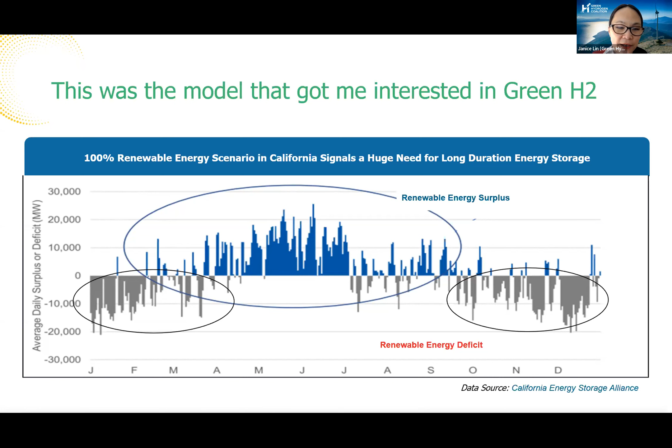Then in my research, I kind of followed in the footsteps of Dr. Starner and learned everything that he already knew way back in 2010: that hydrogen was a mature commodity, that the cost of producing green hydrogen would dramatically fall with scale, and that you could use green hydrogen to decarbonize just about every sector. Some years later, this was 2016, after learning all this, I decided that this really powerful, abundant molecule made from renewable sources was the key to a more sustainable future for our planet.

And I did what every inspired person does: I went out and started a new nonprofit called the Green Hydrogen Coalition. We formally launched the GHC in 2019 as a 501c3 educational nonprofit whose mission is to accelerate a green hydrogen economy. But we're doing it with a little twist, because as you know, there are many nonprofits focused on hydrogen.

One, we're solely focused on green hydrogen. Secondly, we have a thesis that the way to accelerate progress is to simultaneously scale both supply and demand.

Since 2010 till today, the urgency is upon us to go faster. We have to move faster to curb emissions and stop climate change. The rate of climate disaster happening around the world is only accelerating. And as noted by the Consul General, the imperative to have even more diverse sources of energy is upon us.

So the question is, how do we compress this timeline? All analysts agree that green hydrogen will be lowest cost in the future. Some say 2040, 2045, 2050. We need to accelerate that reality to something like 2030.

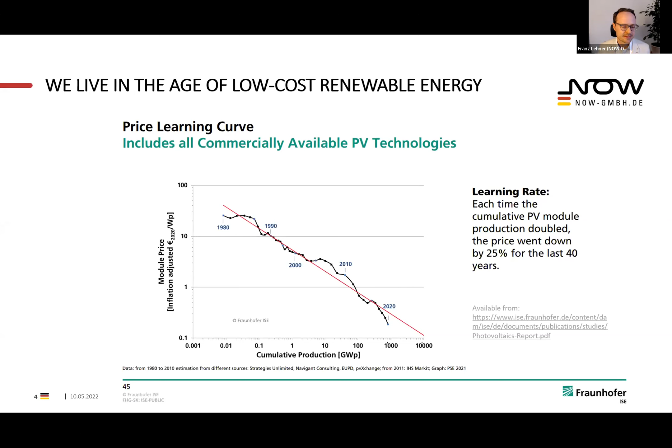So now we have low-cost energy available, but the problem is we have built our energy system on fossil fuels because they used to be cheaper. But for new projects, we can now use renewables as the cheapest solution, and that is exactly what Germany is planning. But also on a global scale, I think it can be said with full certainty that renewable energy is probably the best chance we have to still get to a 1.5-degree scenario by 2050.

Because we have seen in the last 20 years how quickly we can scale up solar and wind, and it's essential how we continue this growth to 2030. So we really need to further speed up and stay on this exponential growth trajectory, around 20% plus per year of solar and wind power generation combined. And that could put us on a track to reach the targets.

I'd like to reemphasize what Janice said: we have the technologies that can get us to low carbon energies, also with hydrogen. We just have to get started, as we did 20 years ago with solar and PV, to really ramp this up. We have to ramp up electrolysis and the production of green hydrogen to get the costs down. The technologies have been known and understood for a long time, but they have to be further optimized, and there's a lot of R&D potential there. But that should not stop us from acting now.

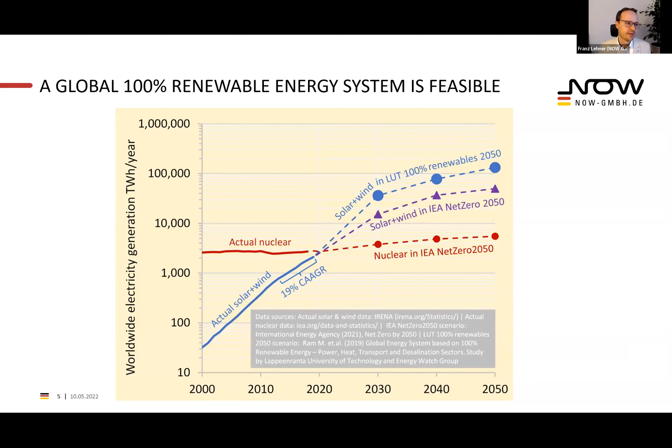We have built our energy system based on fossil fuels. Today, that's the same situation globally, roughly as it is in Germany. We use 80% fossil fuels in the form of molecules in our end users, and only 20% electrons. The academic solution would be to try to change the demand side to full electric use as much as possible, because on the supply side we increasingly get electrons from solar and wind.

But then the challenge in this transition is that we really have to focus on those options that are fast deployable. I think it's a legitimate question to prioritize those measures that are fast to deploy. Just think of how to transition the entire residential sector, building, heating, to heat pumps that can run on electricity, and then also the power grid that has to accommodate this winter load, for example in Germany - that's a process that will take time. We can't really expect that we'll have done this transition within a few decades. This is a lengthy process.

We've seen in the past that on the demand side, measures are slower to implement than on the supply side. So my argument would be to focus on solar and wind to really scale up the supply side, continue work on the demand side as well, but make sure we have enough clean energy available as quickly as possible. This then also requires huge amounts of storage, especially in our climate in Germany.

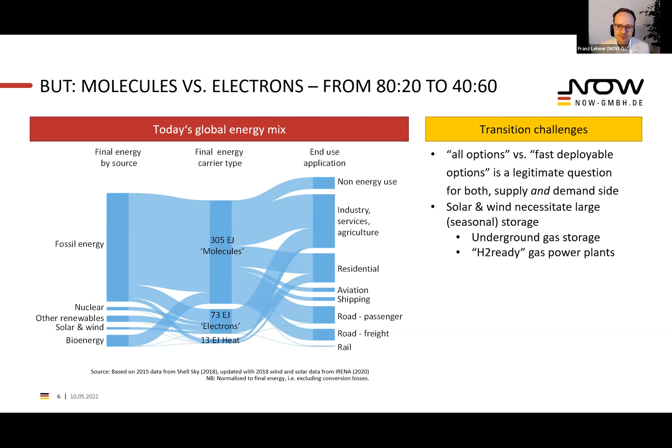We face the problem that batteries are not a solution for annual energy storage. You would essentially have one cycle, charge and discharge, because in a battery the storage capacity and the power density are coupled, whereas in hydrogen you can decouple that, especially with underground storage. That's a relatively low-cost way of storing huge amounts of energy. And then the generation and the use of hydrogen are separate from that storage capacity.

In Germany as well, we have to repurpose or refurbish our power generation capacity to allow for hydrogen use to fill the gaps between wind and solar generation.

Now with the war in Ukraine, we want to speed up the transition away from natural gas, which could also mean that for some more years than initially planned we would use more coal, but then instead of using natural gas as a bridging technology, we'd be able to directly switch to low carbon renewable solutions, and thereby in the long run have the same or even lower emissions in balance.

What I'd like to emphasize is: if we acknowledge that the challenge is to replace fossil fuels in all those large use sectors, industrial uses, we anyway have to make sure green hydrogen becomes really low cost. To be a bit provocative, it has to get dirt cheap, as cheap as fossils are today essentially. Otherwise we can't run those industries in Germany - they won't be competitive. So if we think hydrogen will always be scarce and expensive, we're already saying we will fail this challenge, because we can't subsidize those industries forever.

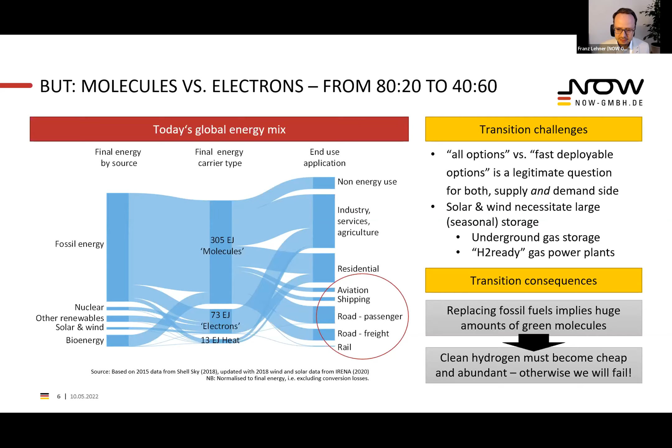As part of our international activities, we represent Germany in Mission Innovation's Clean Hydrogen Mission, where we work together with the United States on reaching the goal of 100 hydrogen valleys globally by 2030, as well as reducing the end-to-end costs dramatically, below $2 per kilogram. And you'll be aware of the Earthshot, where for generation costs the US is aiming at even $1 per kilogram by 2030.

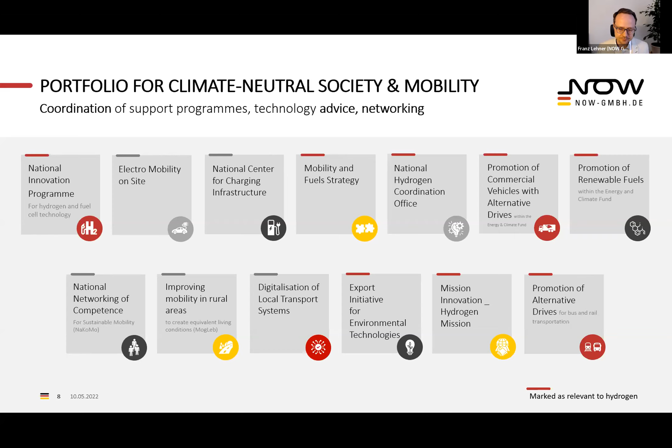Here's a snapshot of where we are currently in Germany. Roughly 100 refueling stations for hydrogen are deployed across the country. We have funding approved and in the pipeline for around 3,300 fuel cell vehicles. On the road today are about half of them, and the rest is in the pipeline to come.

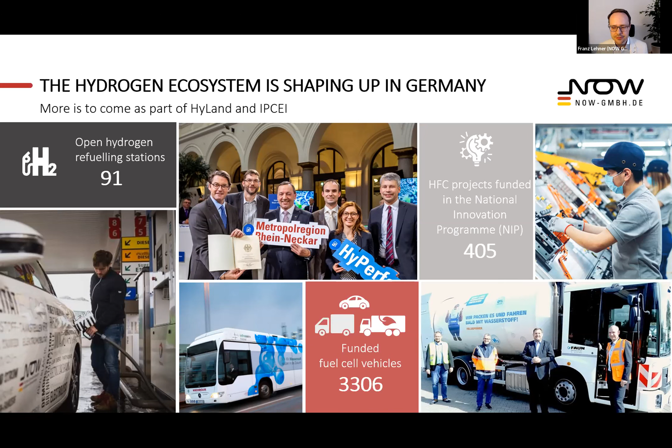We have supported with our National Innovation Program for Hydrogen Fuel Cell Technology more than 400 research, development, and demonstration projects. The refueling infrastructure in Germany follows the approach that we want to solve the hen-egg problem by firstly rolling out the 700-bar refueling infrastructure for passenger cars and counting on the OEMs to then deliver those cars.

That hasn't happened as far as the German OEMs are concerned, so we are now dependent on Toyota and Hyundai to deliver their cars to Germany. And going forward, we will focus our support on heavy-duty applications and adapt existing stations and build new stations for 350 bars to supply heavy-duty vehicles.

I know that California has used a similar approach, but there the OEMs have given the numbers of how many cars they're planning to introduce, and then accordingly the infrastructure has been rolled out.

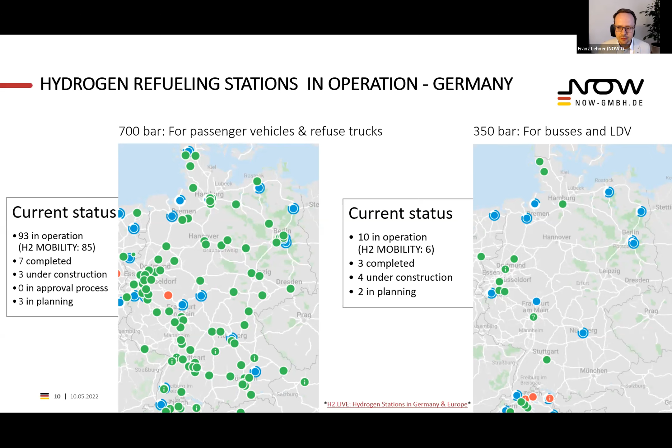At NOW, we support projects along the value chain in hydrogen, from generation of fuels, but then focusing on the demand side with different vehicle type classes and support programs for R&D in various fields. We also work on standards development and agreeing regulatory frameworks with other countries and as part of the European Union.

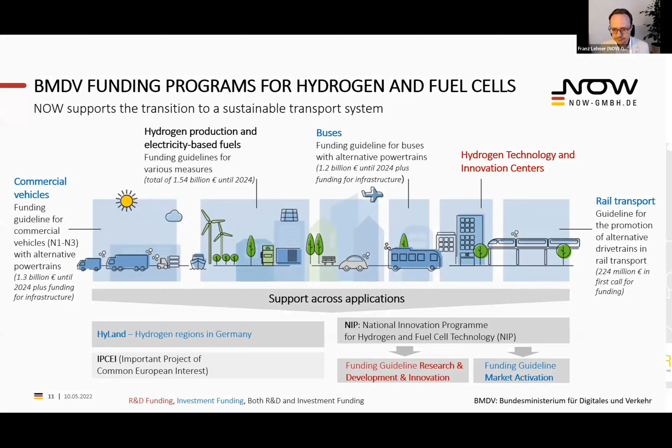One thing that stands out is our regional approach. In Germany, we have the HyLand program, and the HyPerformer regions are something that we would call on the international level a hydrogen valley, an integrated ecosystem from generation, transport, and use of hydrogen.

This is also something we work on at an international level together, for example, with the US as part of the Clean Hydrogen Mission. Why is this important to work with these regional concepts and establish hydrogen hubs? I think it's because we can't just use a top-down approach where through a regulatory framework we incentivize the use of hydrogen. We also need to give the regions, the municipalities, the transport system operators on the ground, what they need to get started with these new technologies.

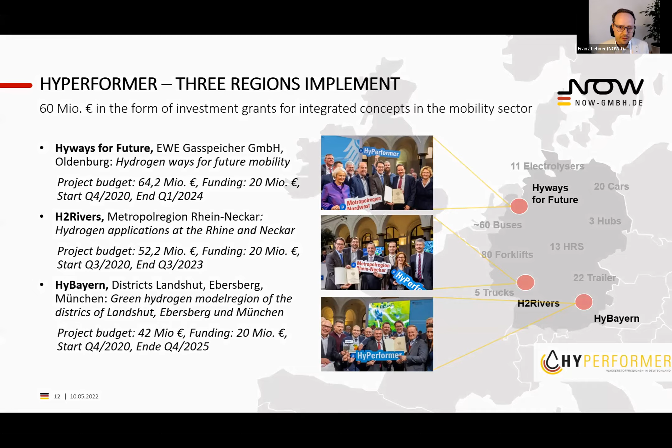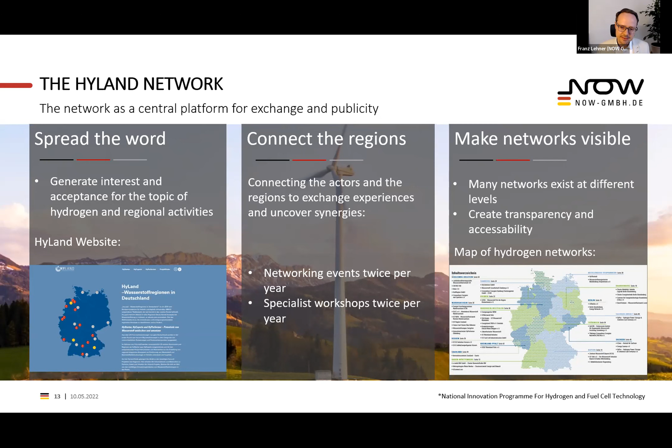So the HyLand program is meant to spread the word, to connect the regions, and to give them the tools they need to develop and also get this across in the international scene.

And then bilateral exchanges that we have and are planning to increase with other nations on the topics of industrial development in the area of fuels and hydrogen technologies, and also helping technology developments on both sides.

And in global affairs, we represent Germany in various initiatives. I mentioned the Clean Hydrogen Mission, but also the IPHE, the IEA Hydrogen Technology Collaboration Program, and we are also involved in H2 Global through the Ministry of Transport, which I will show in a bit.

So, recent policy developments in Germany: Oliver Schramm already mentioned the hydrogen strategy from 2020, which was the first consolidated, all-encompassing document across the different branches of government, where measures relating to the entire value chain have been agreed, along with quite significant funding, 2 billion euros for international activities. A big part of that goes to the H2 Global concept, which I'll mention in the next slide.

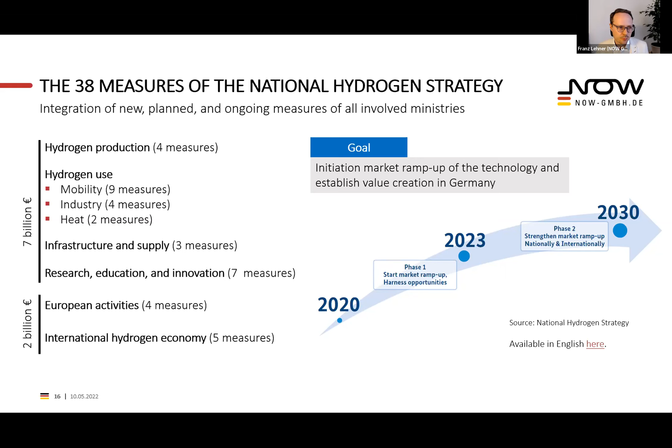So H2 Global is one specific concept and tool that other countries are also looking at, or even joining us in. It's a double auction system where the German government will cover the difference between the lowest production cost on the supply side and the highest bidding price on the demand side, essentially using this as a way of bridging the gap to economic viability.

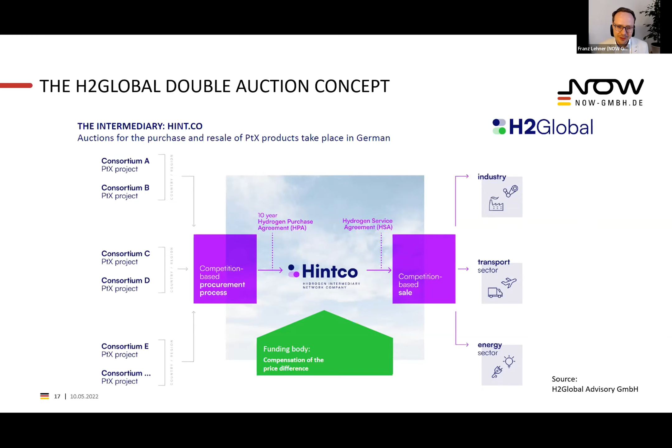That is the problem for many investment decisions right now. We will hopefully see the first round of auctions this year, and then we finally won't have only some studies that calculate the price of green hydrogen, but also a real market signal with a price, what it costs. I mentioned the new government that came into office, and I'd like to conclude with a statement by our Chancellor Olaf Scholz, given while he was visiting the United States in early February, just a few weeks before the invasion by Russia started.

He said, 'We will transform our economy, for the most part where gas is necessary, to a hydrogen-based one. And that will be a process which will happen much faster than some may think, but which will create a great future for all of us.' I underlined here the thing that it will happen much faster than some may think. We have to make it much faster than most people think, but I think there are also good chances, because we have the technology and the industry behind us, to make it really fast in this decade. Thank you very much, and looking forward to the panel discussion later.

Thank you, Franz, for sharing your great knowledge from the German perspective. I think it provides an interesting roadmap that California can look towards. It's now time to shift our attention towards our delegation participants. These experts of green hydrogen, power-to-X technologies and use cases demonstrate the future of our renewable industry, highlighting technologies and methods ready for immediate implementation.

Our first presentation will be by Michael Detering of Detering & Partner. Detering & Partner combines sustainable management and detail-oriented competence towards the entrepreneurial success of their clients. The company's focus is on techno-economical support, especially in the environmental and process engineering, infrastructure, and technical development area. Michael, the time is now yours.

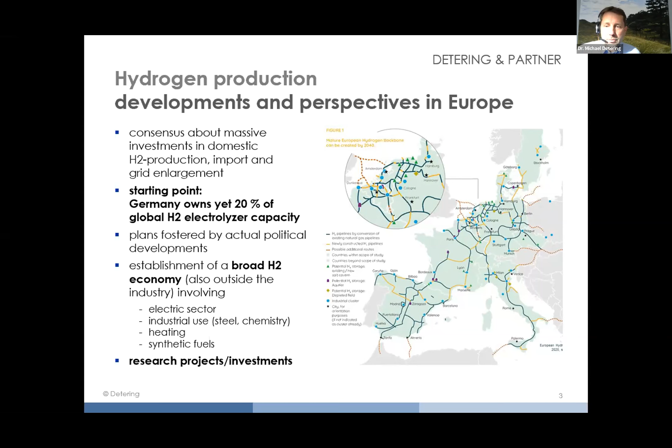Some quick notes about the situation in Germany: we have had hydrogen pipelines for more than 100 years now, and actually the pipeline system is being converted from natural gas towards hydrogen too. So there is some experience, and what you see here is that around 20% of the global electrolyzer capacity is concentrated in the small country of Germany. We already have a broad hydrogen economy, more or less in the chemical industry, and therefore some research is underway. California is on a similar way to do so. We heard about this already, so I'm going to skip the details here.

When we have a closer look at hydrogen, renewable production at the base, which is electricity, is a must for a renewable economy. The problem here, as I know from my past experience heading a large renewable fleet of hydropower stations, wind and solar combined, is that if you sell energy to the public, it's fine, but we need to relate electricity production to the external market and also to the hydrogen sector, and use cost-effective surplus energy. This means ramping up and down the operation of our electrolyzers, which is a big problem, because what an electrolyzer does not want is high volatility in its operation, because this leads to early aging of the components.

The actual electrolyzer technologies still bear massive disadvantages in cost, efficiency, and flexibility, because what an electrolyzer does not want is being operated on varying load. What some developers do is combine it with an additional battery, where energy is stored and then led to the electrolyzer to avoid too flexible operation. But this also costs energy, because the efficiency of good batteries is around 60 to 70%. So this also means a spill of valuable renewable energy.

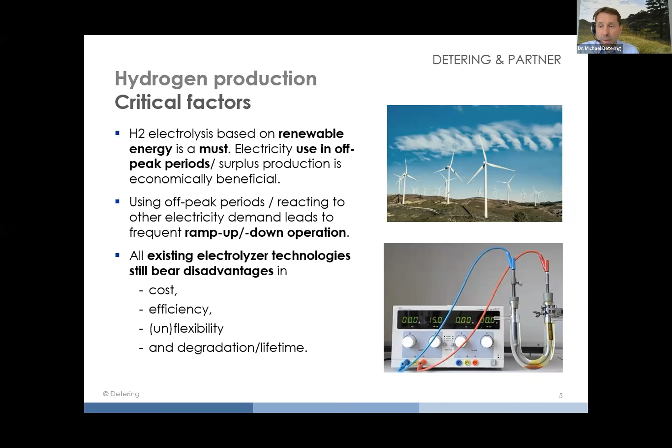And we have the issue of degradation of electrolyzers over time, depending on the technology. What we also see is that with very good materials, the more active an electrolyzer material is, the sooner it ages. The most effective materials have a lifetime of only some minutes, which is not suitable for industrial use, and therefore there is still room to grow. The main three technologies all bear advantages but also disadvantages.

Alkali electrolyzers are robust but not the most effective. PEM, which is a membrane technology, is a bit better in efficiency, but it does not like flexible operation.

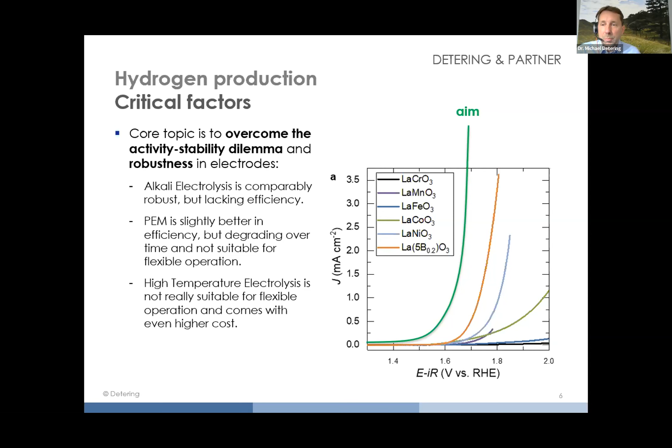High temperature electrolyzers are similar because you need to heat up the electrodes. The thing is how to optimize this. And here comes what we are actually working on with a consortium of several universities.

Our part in this is to bring it to market and look for ramping up and customizing the technology. What we actually have are new materials, high entropy materials, and we see the chance to overcome this because we have very promising lab results, which means the electrodes have the potential of a 5% higher efficiency.

Here we come to physical barriers, so we do not see an even larger increase due to physical limits. The other thing is that we have a significantly higher output. The current we can place on the electrodes is almost 3 times as high, and this means a 3 times higher output per unit.

Of course, we can triple the units, but this wouldn't make so much sense when we would like to increase commercial efficiency. This means a significantly higher output, also significantly longer lifetime, and especially higher flexibility. This is what we need in the future. So this is the actual status we have.

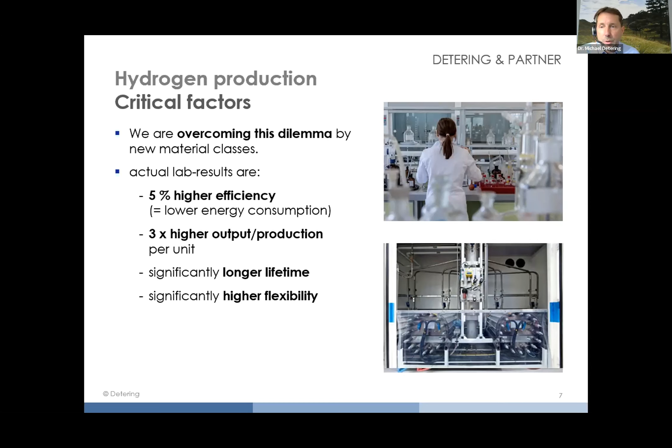The next steps are upscaling this technology to reach a higher technology readiness level, and prepare for future mass production. This means all scales, from industrial use to even home use for small electrolyzers, and having a business perspective on this. This is not limited to Germany or mid-Europe.

We are seeking business partners in the coming months to allow an efficient up-ramping of this technology. So we took the chance here, not having a ready product yet, but starting discussion on this, seeking business partners, taking the opportunity of this meeting and seeing what's going to come in the next months.

In case you have any questions, please ask them or use the chat section.

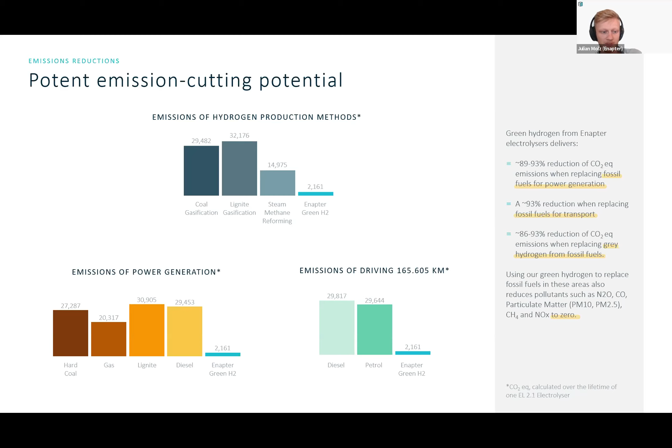What we see is that currently we are basically using oil and gas, mainly steam gas reforming, and to reduce this effectively and in very large amounts, hydrogen can be a big factor in achieving these goals. As Franz Lehner said as well, 80% of the energy currently used is in the form of molecules. So industries such as steel, cement, ceramic and so forth need a lot of energy, which is done with, or particularly done with, steam gas reforming.

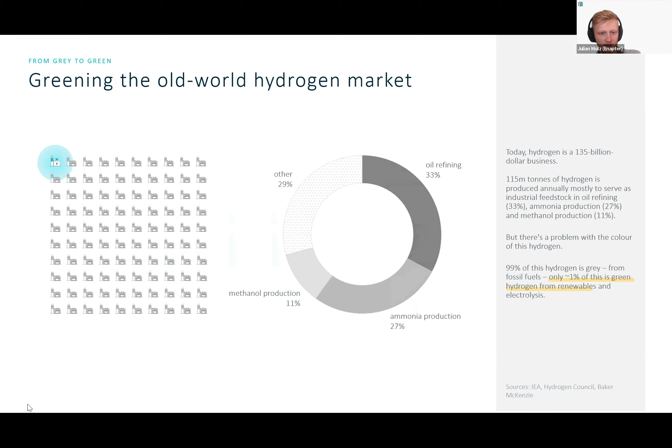But a lot of hydrogen is already in place for ammonia production, for oil refining, and for methanol production in particular. From our perspective, we need to greenify it. We need to reduce the CO2 emissions as far as possible, to move swiftly and to create a solution which is very viable. And of course, what is really crucial in doing this is bringing down the costs significantly for green hydrogen as well. This is one of the targets you will find with Enapter.

And then next to industrial needs requiring a lot of molecules, it could also be about industrial gases such as ammonia, methanol, and so forth, which are mainly produced with steam gas reforming at the moment. Due to rising gas prices, this will become even more viable, faster, with green hydrogen.

Enapter started itself in 2017. The technology we are working with is the AEM technology, which has been developed with a previous company called Acta Spa since 2004.

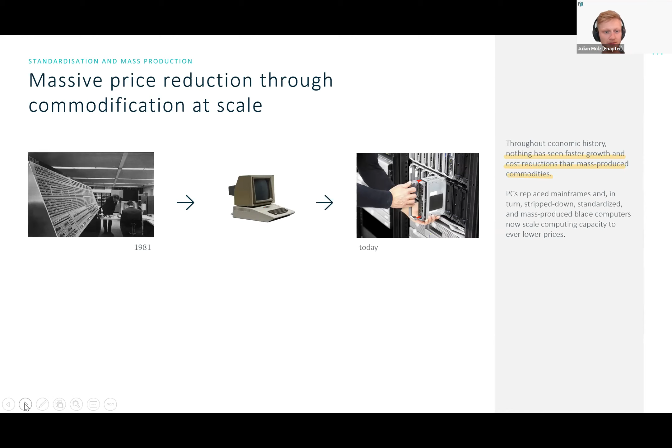And it's the same with the solar industry. In the past, we were mainly focused on utility scale applications, building very large energy plants. But particularly with solar modules, mainly 400 watts or even less, you're building up large capacities, a couple of megawatts and so forth, with very small modules. The same is the case here. Everything breaks down to standardization to bring down costs and provide a valuable product. Depending on the region, I think solar is now even the cheapest energy source you can find in the market.

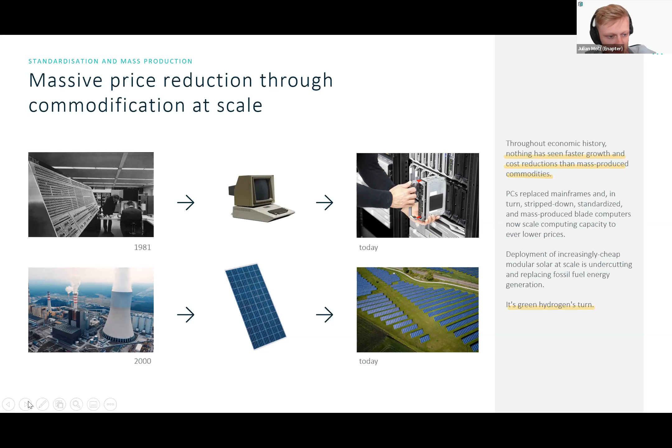My laptop is a bit slow today. I hope it's changing now.

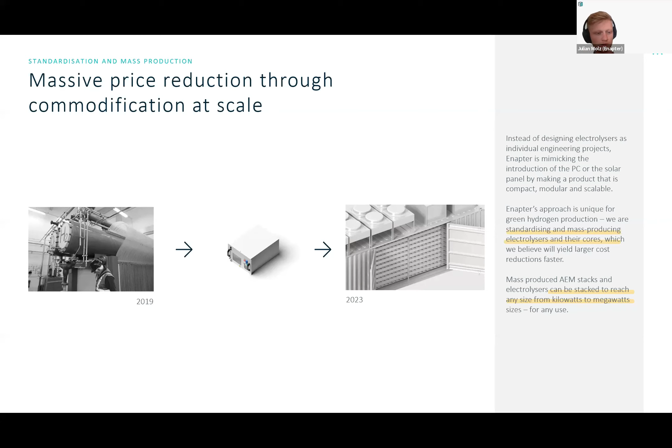What we are basically doing is packaging this differently. Instead of having a very large hydrogen production plant, we are putting it into a small module, as can be seen in the middle. But this can also be packaged in a megawatt container, just putting 420 of these 2.4 kilowatt electrolyzers into a 1 megawatt container, which offers a lot of flexibility, as units of 2.4 kilowatts will be connected to each other to produce at different rates at different times due to the load, due to, for instance, solar irradiance and so forth.

So what Enapter delivers is actually a technology in the middle ground. On one hand, we've already heard about the PEM system. I think the PEM system has the advantage of providing very pure hydrogen, mainly due to a membrane. Also in terms of efficiency and performance, it tends to perform better than an alkaline system. But the big bottleneck, and the lion's share of the cost, are the noble metals—using a lot of iridium, platinum, and so forth to build up that stack. This is an advantage of an alkaline system, providing a cheaper, more cost-effective solution, while using an electrolyte.

What you'll find on the anodic side is that we are using a 1% KOH solution. This way, we are mainly working with nickel and stainless steel to build up that stack itself, to provide strong performance and efficiency, as well as a technology which is as cheap as possible, to tackle as many projects as soon as possible.

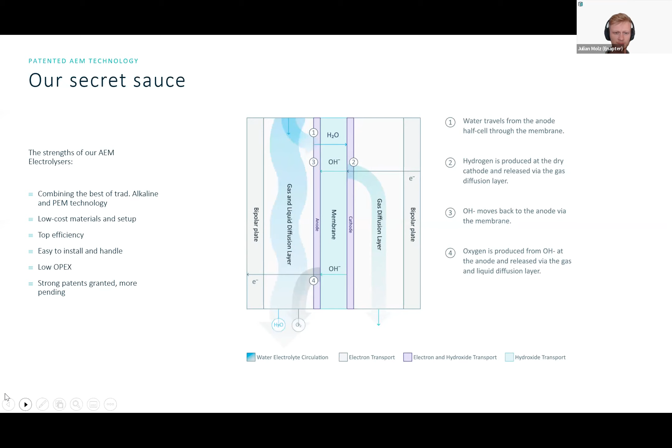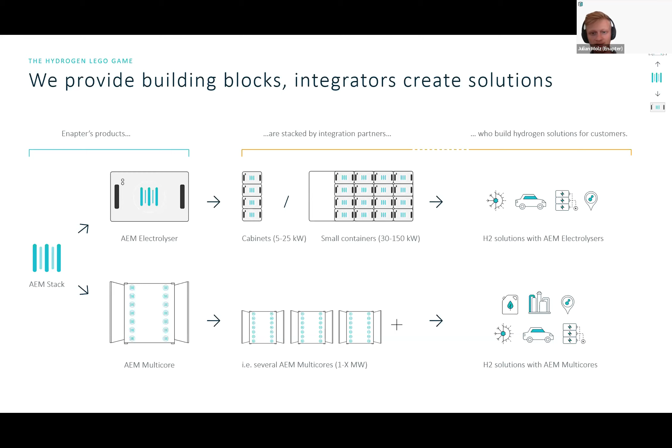As Enapter, since we are focusing on the manufacturing of these devices, we are mainly looking for integrators who can package it all together. In almost all cases, the end customer would also require a storage solution, maybe a fuel cell, maybe a compressor for that whole system. So we are very much on the lookout for integrators who can deliver a turnkey solution to the end client. I see Preston is already here.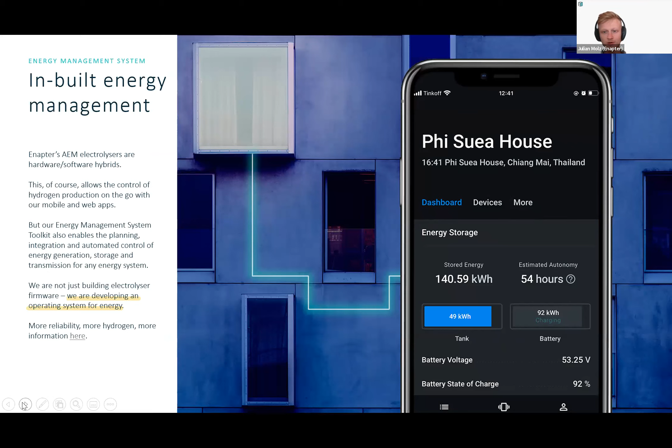I'll try to wrap it up quite quickly. Our system also comes with an energy management system, so you can integrate third-party devices to form a full system in which everything can be controlled.

As said in the beginning, we already have a lot of use cases in very different industries, and we would be very happy to add even more to this. I would end with this slide. During this week, we are very happy to have quite some meetings. Just reach out to either the organizers or to me directly, and we would be very happy to take it forward and meet you guys. Thanks for inviting us, and have a good day.

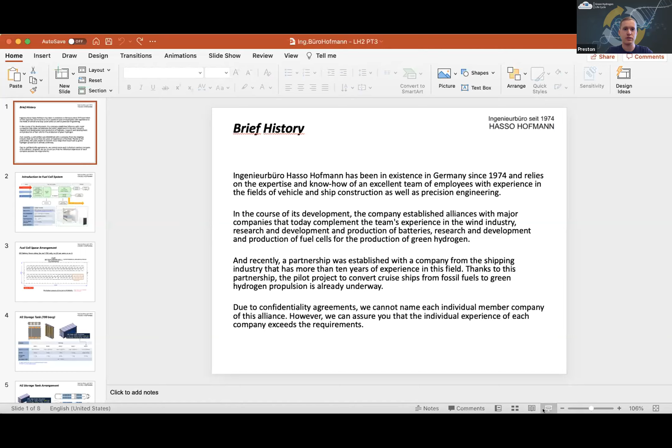We'll now move on to our third expert presentation from Hee-Jin Yoon Hoffman from the Engineering Office Hofmann. The Engineering Office Hofmann has been evaluating the furnishings and technical systems of various sectors. For example, one of their projects focuses on working with high-pressure hydrogen storage tanks, used in hydrogen-powered vehicles and constructed with lightweight carbon fiber winding for mobile use. Hee-Jin is joined by Peter Marcus from Nirvana Cruises, which develops and constructs innovative luxury small cruise ships. These two companies work together on maritime hydrogen activities. I now hand the time over to Peter Marcus.

Well, thank you, Preston. Good day to you all. As has been said, my name is Peter Marcus of Nirvana Cruises, and I have a very close cooperation with Mrs. Hee-Jin Yoon from Ingenieurbüro Hofmann, who has been in Germany since 1974, so she has a lot of experience and expertise in the field of renewable energies. It's a company with well-established employees with a lot of dedication and expertise in the wind industry. We have quite a few partners in the industries, in research and development, and in established projects in the hydrogen field. We cannot mention all of these, but one of them is quite a big multinational as well. So we have quite some serious partners in this business.

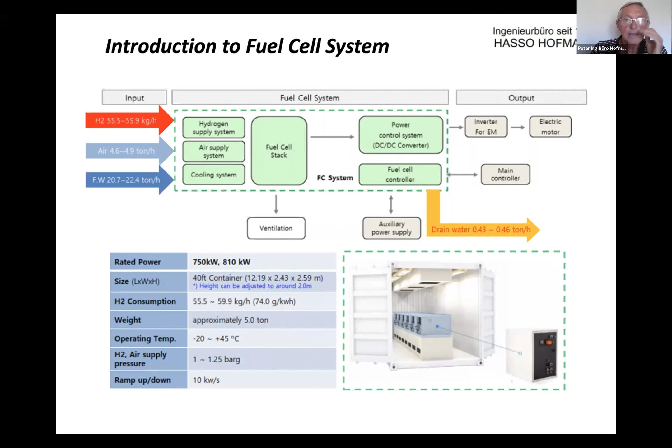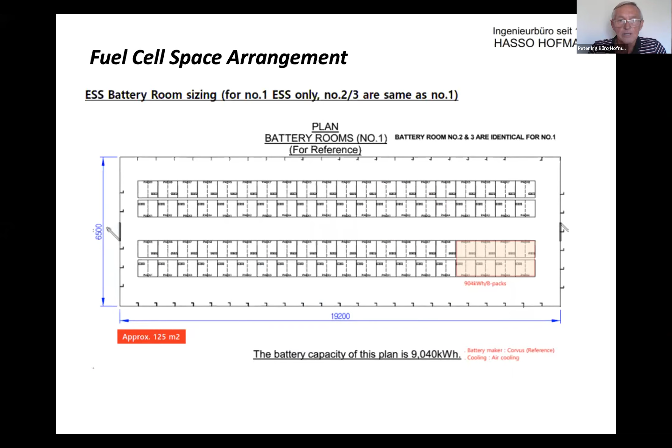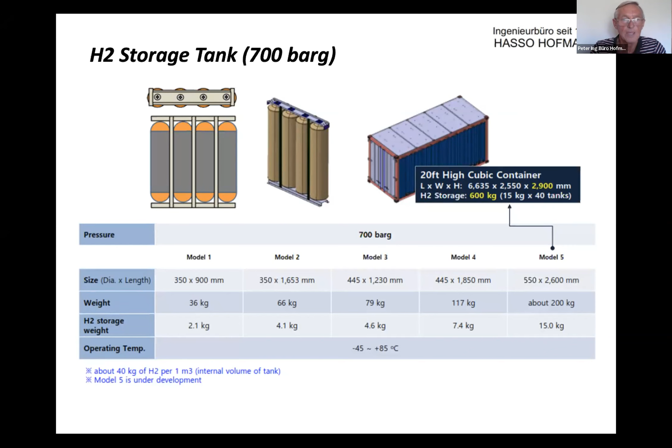The tanks can be placed in one big container, or in several containers, so the containers will be taken off the ship, four at a time, and exchanged with new ones. Thank you.

So the liquid hydrogen gives us a lot of advantages in using less space. And as you all probably appreciate, the space on the ships we need for passengers, which actually makes the money for our business. So we go with liquid hydrogen being our preferred option. Thank you.

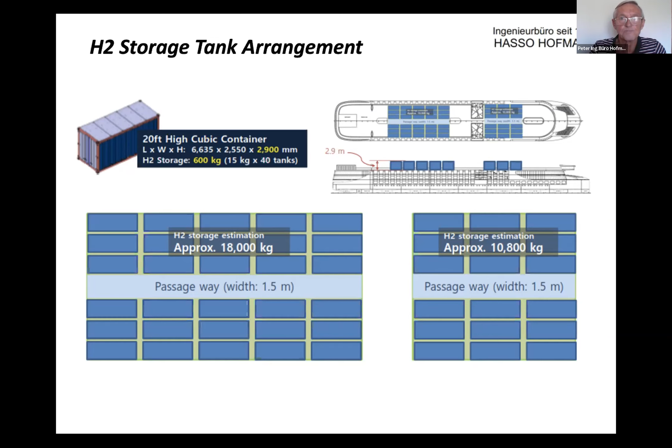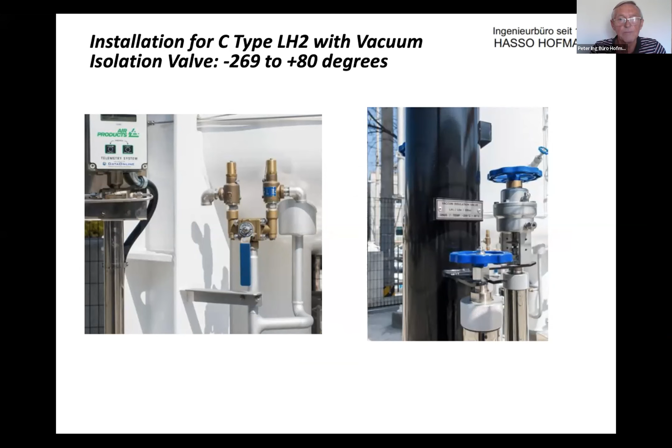Here's a more technical side on what type we use for the liquid hydrogen in the tanks and valves, which is not really my expertise, but questions may be asked later to my colleague Janice. Thank you.

Basically, here's the project as we would propose to any partner who would be interested in taking this on with Büro Hofmann. Of course, it can be done in a special purpose company, a joint venture, or any other form of business.

The way we do these things, we can take on everything, meaning we can design, develop, and construct any hydrogen plant, take care of the storage in gas or liquid form, and take care of transportation, whether on the road or on the water, either river or high seas. So we take care of the whole area of hydrogen, and we would like to invite any company in California interested in any joint venture or other form of cooperation with Büro Hofmann.

We would like to invite you, and we will get you a proposal on this project and see where we can bring it. Thank you very much.

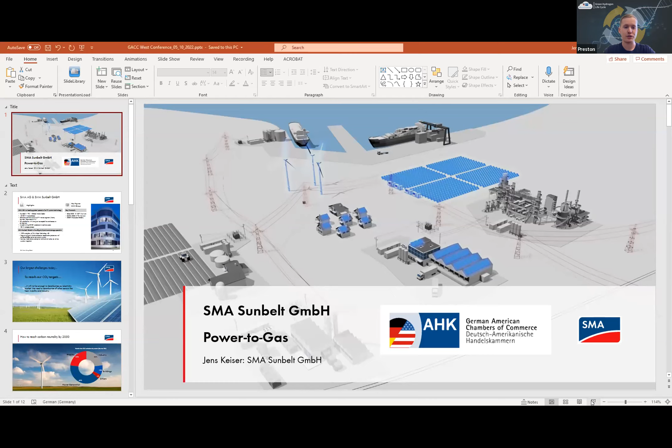Thank you very much, Preston, and thank you to the German-American Chamber of Commerce for putting on such a great event. It's a very timely event. My name is Jens Keiser.

I'm representing SMA Sunbelt GmbH, and we fairly recently went into the power-to-gas market, and today I'm going to tell you a little bit about how we fit into the hydrogen value chain. It's a fairly complex value chain, and we cover a small part of it.

So just a few words about our organizational setup. SMA is really known from the PV inverter space. We have the big mothership, SMA AG, which has a 40-year history with a global footprint covering all market segments of the PV market, from the home market to the business segment and large-scale utility projects.

We have done that on a global scale. I am part of SMA Sunbelt GmbH, which is a 100% subsidiary of SMA AG, and we are considered the speedboat of the mothership. We look into new market segments, less standardized products and projects, for example off-grid solutions, island electrification, and now more recently the power-to-gas market, which is basically the topic of SMA Sunbelt GmbH. We are located in Kassel, Germany, in the same buildings as SMA AG.

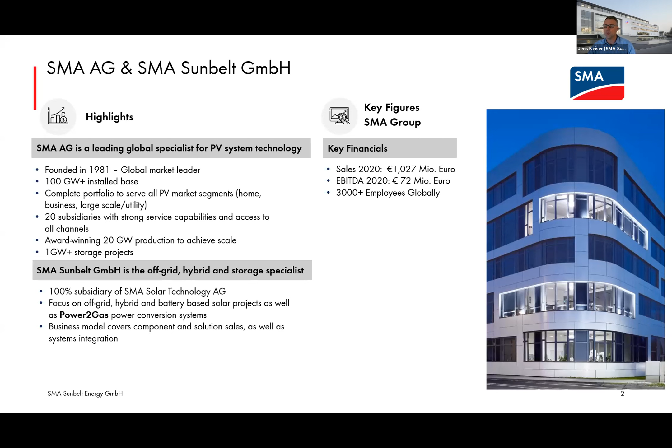The SMA group in general is a fairly mature organization. We have roughly €1 billion in revenue, EBITDA positive, and globally we have around just over 3,000 employees. So just a few general remarks.

At SMA, we always say our most important customer is the future, and we heard it from previous speakers already. The future is at the moment in trouble. We need to achieve our CO2 targets, and it's really not enough to just decarbonize the electricity sector. We really need to decarbonize all other sectors like heat, mobility, and industry. And that's why we believe green hydrogen will play a very critical role going forward to help decarbonize the planet.

Here are some numbers from the International Energy Agency. As you can see, the power generation sector is only 40% of CO2 emissions, and then mobility and industry represent 46% of global CO2 emissions, especially the industrial sector, as we already heard.

Market segments like cement, steel production, and refineries are already using gray hydrogen today. That all needs to be decarbonized. Heavy transportation, container shipping, aviation, long-haul trucking, rail - all of those need to be decarbonized as well, and you can't just electrify all those things. Building heat is another sector where we really need to go into, where green hydrogen will play an enormous role for achieving the climate goals.

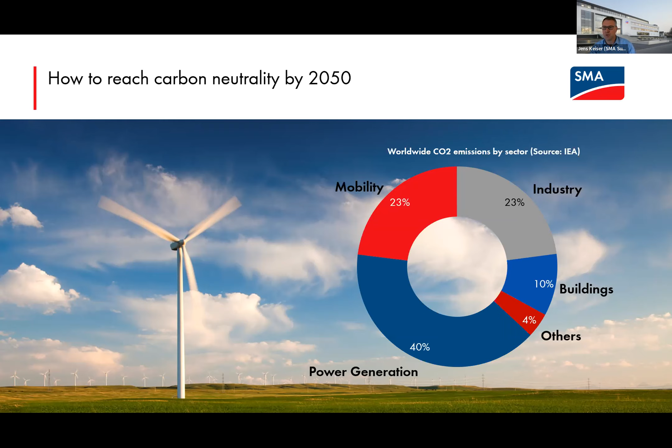So why hydrogen? We love hydrogen because it's super versatile. It has so many different roles. If I had to describe hydrogen with one word, I would say it's flexible. It can be a feedstock for different industrial processes. You can produce it locally. It's non-toxic and very versatile.

Or you can even transform it. If you have a biogenic CO2 source, you can convert it further to renewable CH4 and then inject it into the gas grid. So that's in itself an energy storage strategy - basically the existing gas grid is just a giant battery, and it's super abundant on the planet. So hydrogen has a lot of great qualities, and that's why we like to focus on the green hydrogen market as well.

If you talk about the green hydrogen market, we obviously have to talk about the electrolyzer market, which then plays into what we are doing. The electrolyzer market will explode over the next 10 years. We have some numbers here from IHS - there are different market studies out there, but generally speaking, we believe the global hydrogen electrolyzer market will be north of 150 gigawatts installed base by 2030.

We're happy to see that in 2020 the USA developed a national hydrogen roadmap, and in 2021 the Department of Energy started the Hydrogen Shot Initiative to get to $1 per kilogram in the next decade for clean hydrogen. I think that includes different pathways - they're looking at green and maybe also blue hydrogen. But it's good to see that the policy support is now coming in.

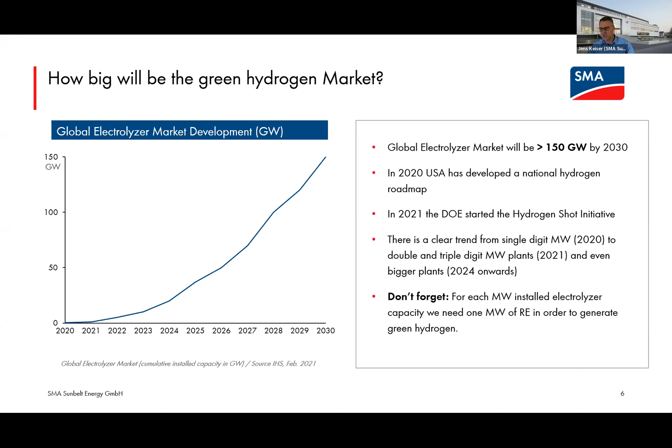What we are seeing on our side - we started getting into the power-to-gas market at the end of 2018 with a few folks, and now we're ramping up the team. Our initial projects were more in the single-digit megawatt space, and we fairly quickly moved into the double-digit megawatt space and are entering triple-digit projects already. It's really moving quickly, that market, which is great to see. And don't forget, for every megawatt of installed electrolyzer capacity, you need 1 megawatt of renewable energy to produce green hydrogen. So the momentum is great.

The market is coming, and this tells a little bit more about how - let me just start the pointer - so how we really fit into the hydrogen value chain.

So we are coming from the PV inverter space, doing the DC to AC conversion to connect to the grid, and that's where we really developed our core competency. We are all about power conversion. We know the global grid codes - we can do this in Australia, we can do this in India, we can do it in the US. We are present in 20 countries.

So we have a lot of knowledge about power conversion. And now we are taking our core competency, doing some adaptation to the technology to make it work, doing the AC to DC conversion and connecting electrolyzer systems to the grid.

You could potentially also ask about DC to DC connection. At the moment, our preferred path is AC to DC because we have very high efficiency inverters, over 98%. So there's not too much to gain if you do a DC to DC strategy. That's really our core competency: we connect the electrolyzers to the system.

We can also do the same thing from DC to AC conversion for fuel cells, but our biggest momentum is clearly the electrolyzer market right now, which moves the fastest. We have projects in quite a few end markets already, the typical hydrogen end markets from refineries, ammonia in the industrial segment, and the mobility segment. So we're not in refineries yet, but we have projects in the ammonia space, the industrial space, and the mobility space.

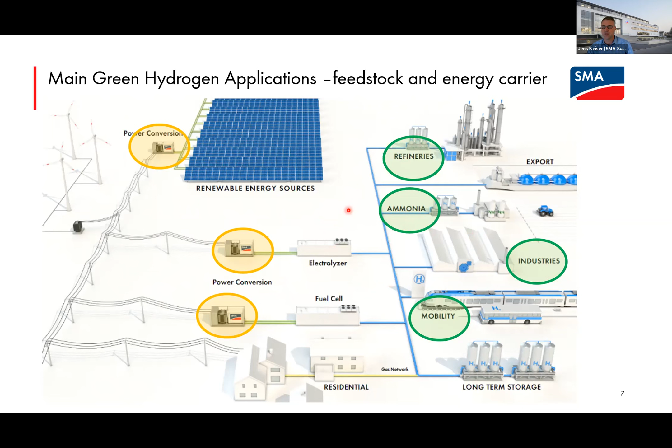This helps you understand how we fit into the typical electrolyzer system. You have the electrolyzer stack, and then you have the balance of the plant. Within the balance of the plant, it's a quite complex setup, with systems control, water treatment, gas drying, etc. We are just really this one part, and we consider ourselves to be the gearbox of an electrolyzer system.

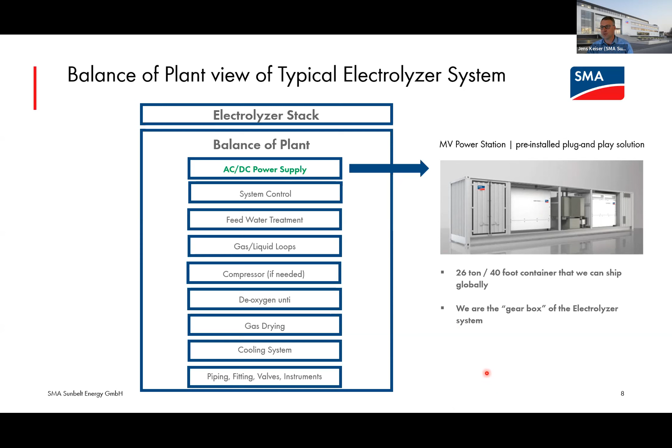On the right side, you see a typical product that we are using right now for a larger scale project. That's a 40-foot container that weighs about 26 tons, and we can ship that globally. We have all the logistics already in place for that. They can come in different flavors: we can do 40-foot containers, 20-foot containers, and we can even do smaller systems below a megawatt.

Then we will move outside of the container. But the demand and pipeline that we're seeing are all kind of going into large scale systems. At the moment, we can do up to 5 megawatts in a 40-foot container, but that will go up as well.

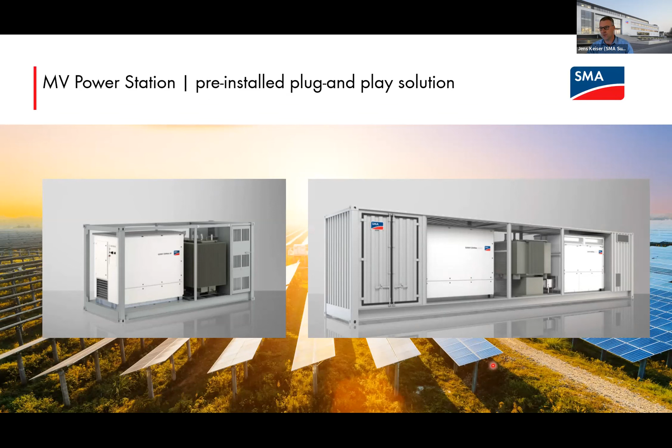That's also necessary because that's where the market is going as the project size for hydrogen systems increases. Just a little bit more detail on the container: those two white boxes you see here are our inverters, that's the core technology. It's an IGBT-based inverter technology produced in Kassel, Germany.

In the middle, you see the medium voltage transformer that can connect to the different medium voltage grids in the world. We specify those, getting specifications from our partners to make sure we get the right transformers connected. We have excellent relationships with the big transformer manufacturers in the world.

On the left, you have the medium voltage room where the medium voltage switchgear is. You can also say you don't want the medium voltage switchgear, we can take that out. If you want to use your own switchgear, there's some flexibility. On the right side, you have the low voltage room where you typically have the connection to the electrolyzer. This is a system that's very popular right now with our hydrogen projects, and a fairly established use case.

You can basically commission those systems in 4 to 5 hours if everything is in place at the construction site.

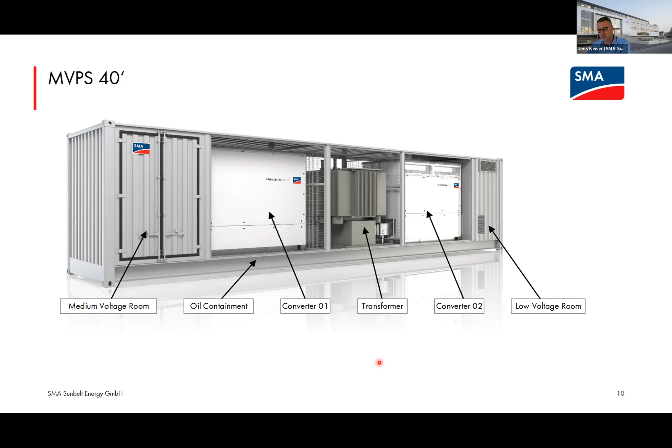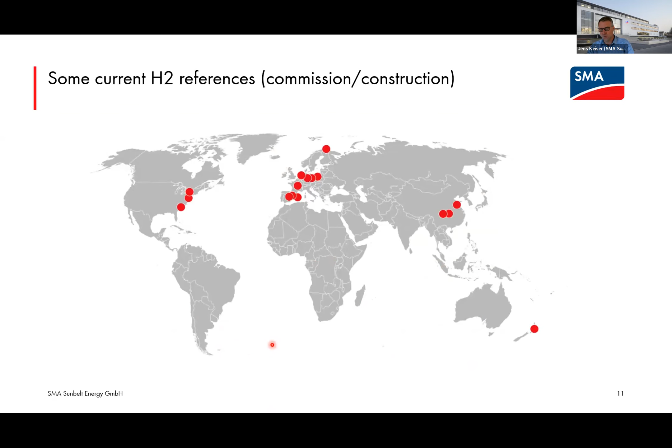We started in 2018, 2019 with our power to gas efforts, and as you can see, we are already close to 20 projects globally where we're doing commissionings and constructions. We can actually not cover enough markets, we are not doing much in South America yet, we have to get into that market as well. But the pipeline is moving very, very quickly, and it's great to see.

I just want to close by saying, the best way to predict the future is to create it. So I think we are all here to build a clean planet, a planet where our children can live on. I think we owe it to our children to really tackle the climate challenge. And that's it from my side.